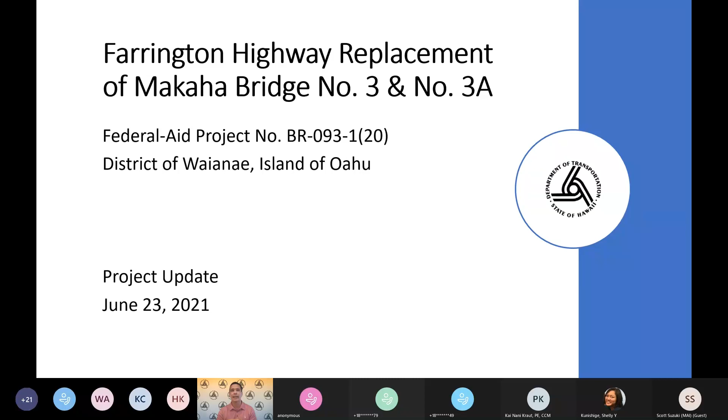I'm Ed Sniffen. I'm the Deputy Director of Transportation for Highways. And we have on our staff here, or with us here, our design staff, our construction staff, and the contractor that's working on the project as well. So we can answer any questions and take any comments that you might have on how we reset this project. Next slide, please.

So for those that are on their phones, I'll just describe the slides as we're going through because you can't see it. The first slide just shows the project location, showing Makaha Bridges 3 and 3A. These are the two bridges that we're moving forward on replacing. They're two aging wood structures. The need for this replacement is to make sure that we improve the structural integrity of these structures for this area, reduce flooding through the area upstream and at the roadway itself by opening or increasing the hydraulic opening, and improving safety overall throughout the route.

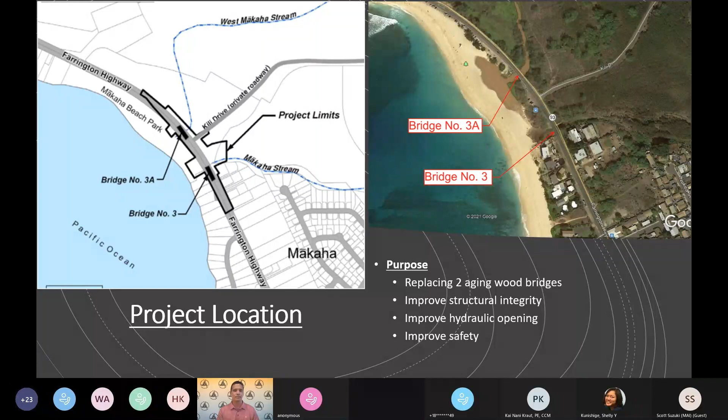Our original design took into account building two new reinforced concrete structures. With that, because concrete has to be poured in that location, and we can't precast it outside, we considered, or we proposed, a bypass road that would bypass both of the bridges to ensure that we could construct both bridges in place during the length of the construction period.

In March of this year, we moved forward on awarding this contract to our contractor. Then we paused the project.

We wanted to make sure that we considered the future use of this corridor, future impacts based on sea level rise and climate change, and also the concerns from the community throughout. So we held up on the project to reset, relook at the designs we had, reconsider how we move this forward to minimize impacts to the public, take into account the concerns we heard, try to address them, and also put in facilities more appropriate for a corridor we know will be impacted by sea level rise in the future.

So in April of this year, we held off on the project. In May, we did some pre-consultation with community members to get more feedback as we prepared for today's June stakeholder engagement, where we share our plans and proposed path forward.

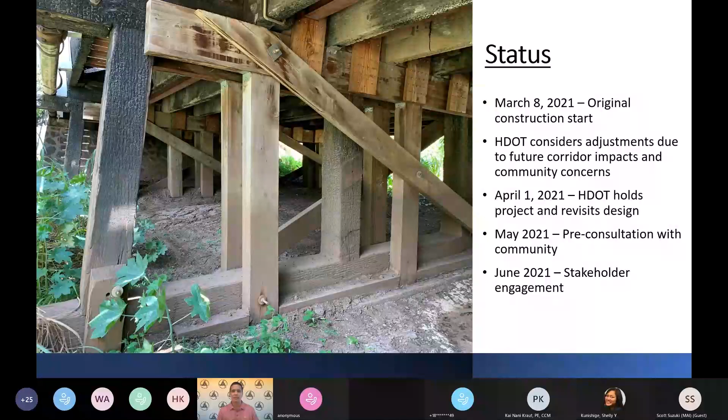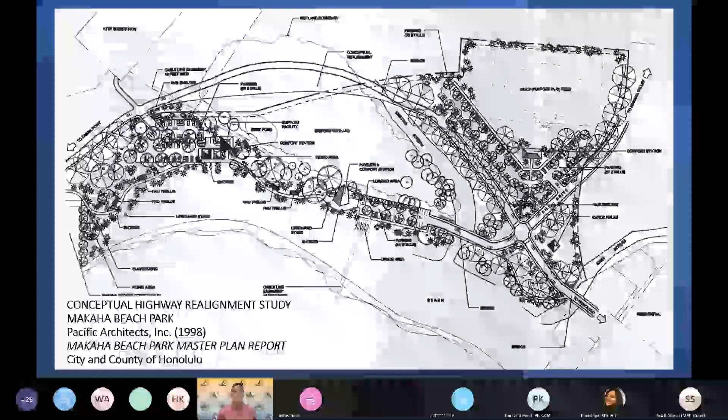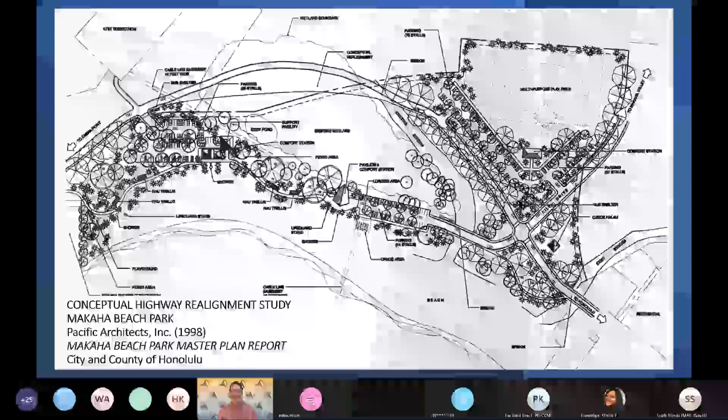Throughout, we've been considering the conceptual alignment study done from Makaha Surfing Beach back in 1998 by the city. It proposed realigning Farrington Highway around or on the Mauka side of the park in that area. That realignment was then considered for congestion management and traffic flow. Today it takes more precedence from a resilience perspective, to pull our route away from the ocean and the impacts it could have.

Next slide, please. I'm going to hit pause because I don't see the slides advancing. Does anyone see it on their side? Oh, okay, yeah.

Considering the community's concerns about impacts to the rights of way necessary for the project, putting in structures that would last 75 to 100 years, take 2 years to build, and have significant impacts on the beach side through our bypass road, we decided to reset.

Instead of looking at the original project, we wanted to make sure we had a project that didn't preclude any future realignment of Farrington Highway. We're not going to put extremely expensive structures in place that would last 75 to 100 years if that route may be realigned.

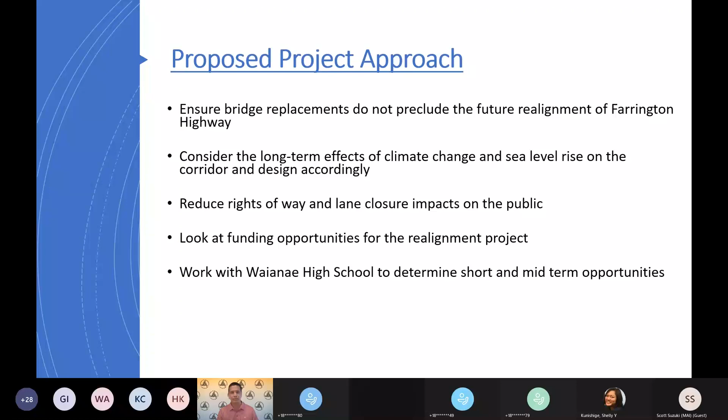We don't know enough about the area yet to fully consider all of those infrastructure improvements and needs, so we're going to work with Waianae High School and community members to come up with plans to make improvements in the interim and in the long term.

So for the proposed redesign, to make sure we can minimize impacts to the community, we're looking at putting in 2 steel structures instead of the 2 reinforced concrete structures. Those steel structures will allow us to prefabricate the structures themselves prior to launching them into place. That precludes the need for the bypass road.

So moving towards this type of construction gets us immediately to eliminate the bypass road that we had in place on our plans before. We also eliminate any temporary bridges and culverts that we had in place as part of that bypass road. With our steel structures themselves, they can span a lot longer lengths.

So on Makaha Bridge 3, where we would have required a center pier within our channel in that area to support the long length structure, we now can eliminate that center pier and just support that structure on the abutments on the ends. And it's also going to eliminate the need for the construction parcel in Kia Mung's property.

So we'll no longer have to take during construction any property that was related to that bypass road need in the past. Okay, I apologize for that. We came up with a better solution to make sure that we wouldn't have to impact you and your family's property there.

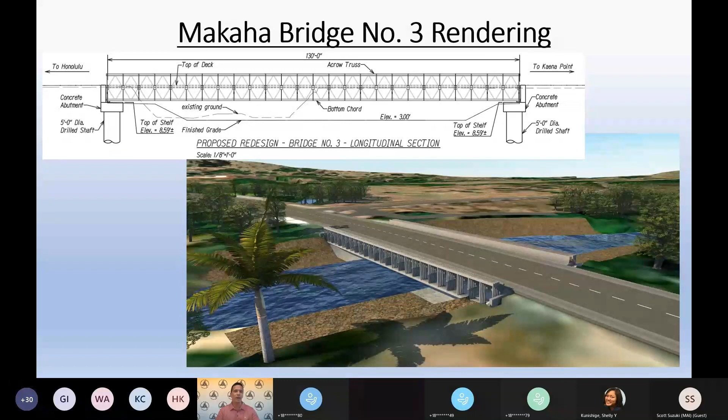Next slide, please. This is a section view on the top and a rendering of what the structure would look like on the bottom. This is for Makaha Bridge 3. Next slide, please. And this one is for 3A. And after we finish up the presentation, I can always come back to these slides if you'd like.

Doing both of these bridges, there's going to be a requirement for us. What we're going to do, we're going to be building these new structures on the edges of the road. So for Bridge 3, that's on the east side of Kili Drive, we'll be building that on the Mauka side of the highway. It'll be supported by 6 foundations or pads, just to make sure we can keep it in place. And when that structure is completed and we're ready to move it, we'll deconstruct the existing bridge and slide over the new bridge into place.

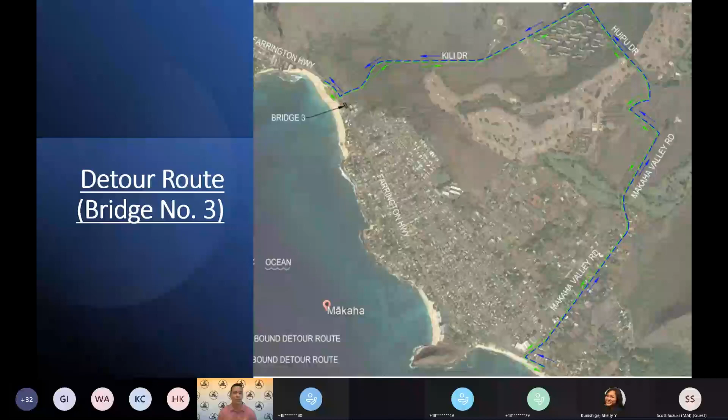During the 3A closure, there is not a detour route available. So during that 1-day shutdown, we'll be working with emergency management to ensure there's emergency services on the west side. We'll be putting plans in place to ensure that if there's an emergency need to cross this area with vehicles, we can provide that access.

We'll also be working with the military to ensure they understand there's going to be a 1-day closure through this time. These closures will be planned far in advance, and we'll make sure we get these dates to all community members and affected stakeholders to ensure everybody can plan during that time. We'll be working with emergency management.

We'll also be working with the city to ensure we can look at transportation alternatives during this one-day shutdown. We're going to be choosing time periods that'll be best for the community, so hopefully we can start the one-day closure in the early evening or late evening and continue from there.

That's all I have to present. We wanted to keep this short so we can take any questions, comments, and concerns to ensure we can move this project forward in the best way. Thank you very much for your time.

Okay, so we're going to open it up to Q&A. We had one question from Carmen Guzman Simpliciano in the chat: how can I be involved as a community member when you research the areas pertaining to the wetlands? And the second part of her question, will the recording be sent to us via email? We did mention that it will, so I'll be posting that as a link to our presentations page.

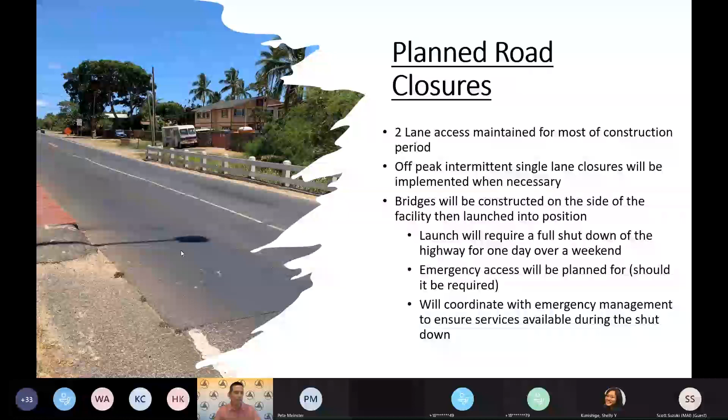Okay, and then we have William Isla from DHHL: thanks for listening to the community and creating a better project, including applying for the federal grant to plan for road alignment consistent with the master plan in the 90s.

Thank you, William. And then next we have former Representative Jo Jordan: how are you handling the bus transportation during the closure period? Really good question. We're working with DTS now to figure out what that schedule is going to look like, to see if there's going to be a bus that goes to the structure itself and a bus on the other side to get people there. We're hoping to work that out with them, and we can get back to the community on those details as soon as we complete them with DTS.

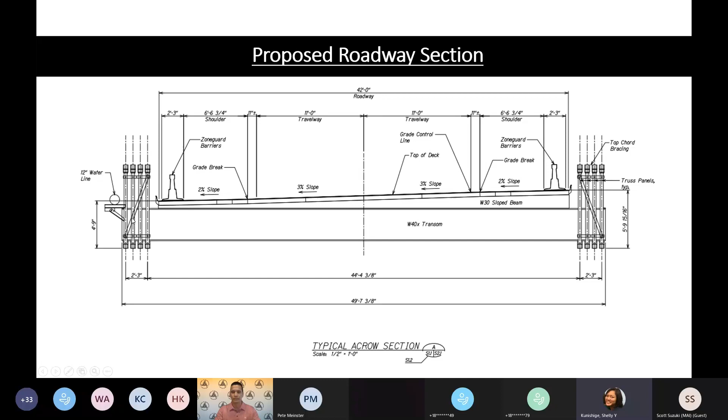Okay, we have one hand up in the participants, Ms. Guzman - Simpliciano. Hi, this is Joseph Simpliciano. How you guys doing? I just had a couple of questions.

One was, will there be any speed mitigation on these new bridges? And the other one was - I know Kili Drive isn't even a city-owned road, but it's kind of an issue right now because that road's not even supposed to be there. What is HDOT's take on that, being that Kili Drive is connected to Farrington Highway? Will there be any plans for the city to absorb it or anything like that? I know you guys aren't city, I know the difference, but I'm just wondering, how are we going to move ahead with the realignment if Kili Drive is a problem?

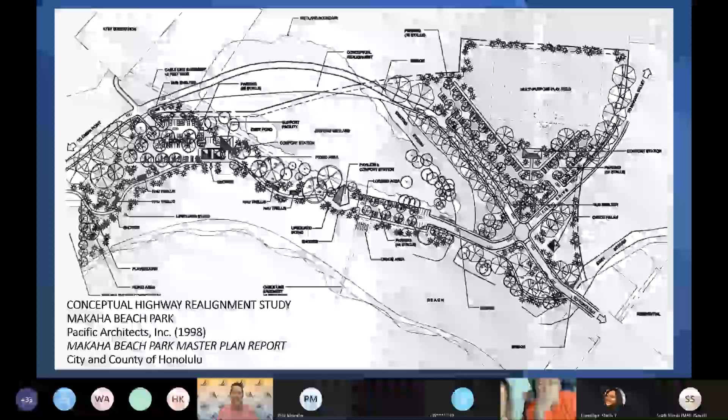Thank you. Yeah, so a good question. We will consider all of that as part of the realignment, especially where the realignment should start. If we realign starting from the east side of Kili Drive, that means we'd have to cross the stream twice with the new road. If we started the realignment on the west side of Bridge 3, then we don't have to cross the stream, and we get a little bit more options as we go. So we're trying to consider those options as we move forward. The application we're going to submit to the federal government isn't necessarily going to cover the perfect alignment, but it will give us funding to start studying it to make sure we push forward the right one. We'll definitely come back to the community to talk about that. On speed mitigation, on the bridge itself, we don't have any plans for speed mitigation.

Talking to the community, especially in front of Makaha Surfing Beach, we definitely saw the need for something out there. We put in speed humps near the pedestrian crosswalk, blocked off stalls to make sure people can see pedestrians walking to the comfort station. But outside that area, some people are still going a bit fast. So we're hoping to work with Waianae High School so the kids can help us come up with solutions, like raised pedestrian crosswalks we've done in the past, or other speed mitigation, as part of short-term improvements for that route.

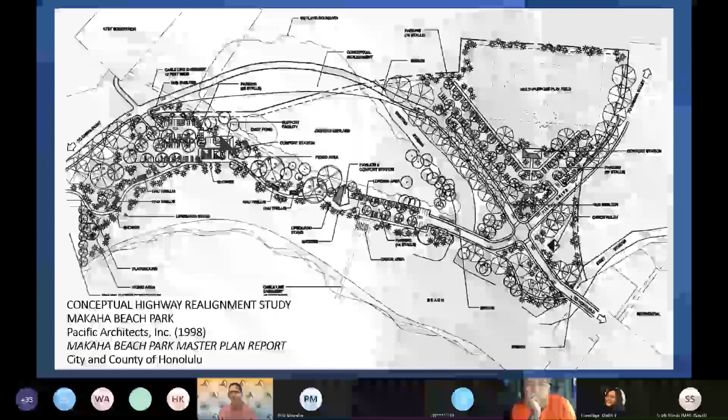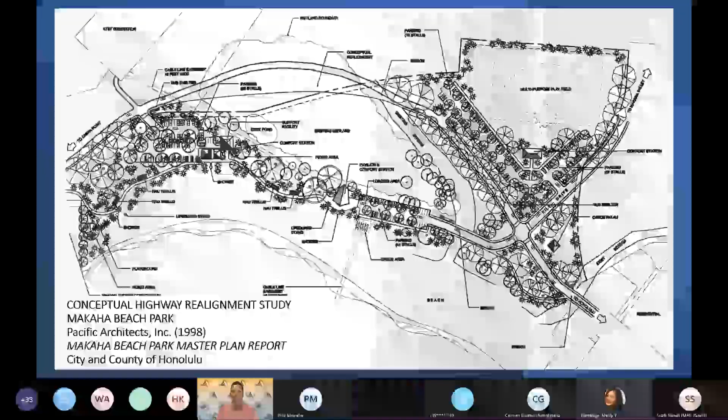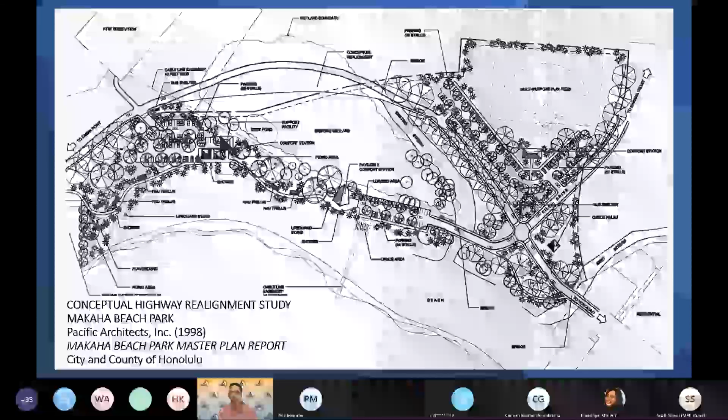Next we have a question from the chat from Trish and Mike: can you please repeat what is happening with the Makaha Beach Park Master Plan, and when will that begin? The beach master plan itself is the city's. But for us, we're looking at realigning Farrington Highway to get it outside of the park so it can be master planned. To do that, we need $75 million, so we're working with the federal government to try to get a discretionary grant to kickstart affordability for this project. We don't have a time frame yet, but we have a go-forward action on it.

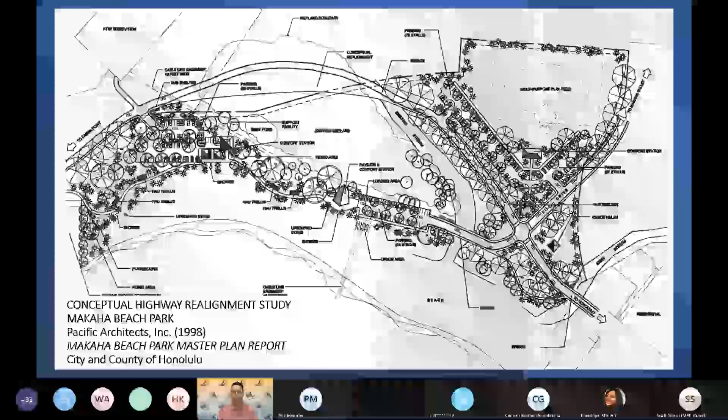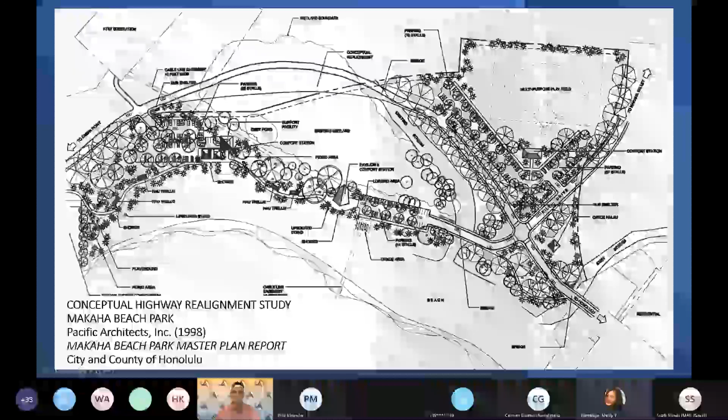Another question from the chat: Pete suggests maybe coordinating with one of the local grocery stores, Waianae Store or Tamura's, to set up a little convenience stall on the closed side, since there are a lot of residents northwest of Kepuhi Point. Good question, good suggestion. We'll definitely reach out.

One more question from the chat, from former Representative Jo Jordan: there may be a challenge since the bus uses Makaha Street as a turnaround. Definitely, so I'm going to let the smart folks at DTS figure out how best to adjust. We'll work with them and get back to the community with information on how we can adjust on transportation.

Another question from Carmen or Joseph Guzman Simpliciano: as part of my petition, Save Makaha Beach, it addressed the need to restore water to the muliwai. Will the realignment project include this with the Board of Water Supply? We can look at how to consider it or add it into the project. I don't know all that's necessary to include, but if you can give us contact information, we can reach out and talk directly with you.

Another question from the chat: with whom is DOT working regarding the sewer line realignment? Sorry, what was the question again? With whom is DOT working regarding the sewer line realignment? Anytime we work through realignments that require relocating facilities or utilities, we always work with the utility owners.

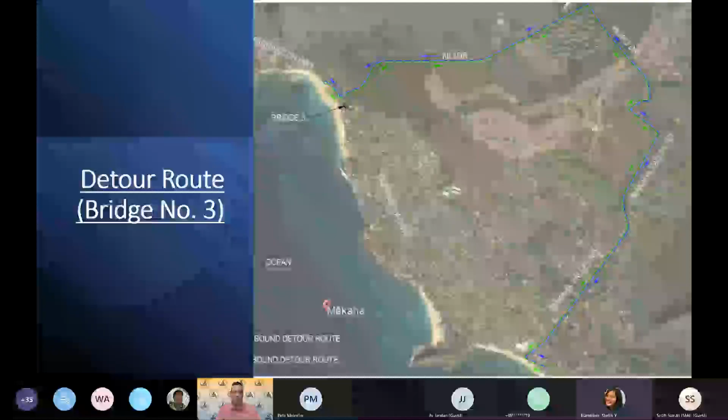We have a request to put up the slide with the side view of the prefab bridge. What is the foundation for the bridge? The foundations are drilled shaft foundations that support the bridges at the ends, at the abutments.

From Ms. Guzman Simpliciano: can we get cement barriers dropped on the Makai side by the first bridge to protect iwi kupuna there? Sorry, off subject, but it would be great if you could work with the city to get that done, since lifted trucks ride through the sand in that area. We can work with the city on that.

From Trish and Mike: are those foundations built on day of replacement or ahead of time? Those are built ahead of time. All the foundation work and prefab work will be done prior to the one-day launch. During that one day, the only work will be deconstructing the existing bridges and launching the new bridges into place.

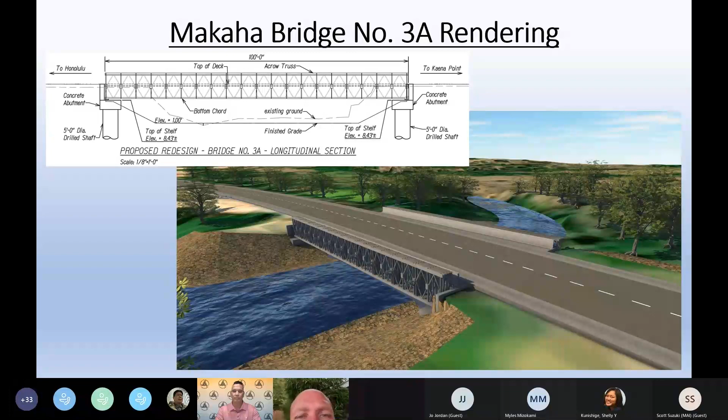Where do you plan on parking and storing all your heavy equipment? There is a staging area for us to utilize at the lower left side of that intersection, which we had started clearing out. I saw that clearing in March and was curious why it was being done. That's the parcel for the staging area.

In the chat, Michael Rice asks if this is similar to how the military does it with their temporary bridges. I believe so.

Given that we have the contractor on, what confidence does the DOT have that the contractor will see this through at the existing quoted cost and on time? We've seen issues before where projects start and midway or a quarter of the way through, the contractor is suddenly replaced because certain terms weren't met. Do we have assurance that won't happen here? I feel very comfortable — we haven't had to fire this contractor yet.